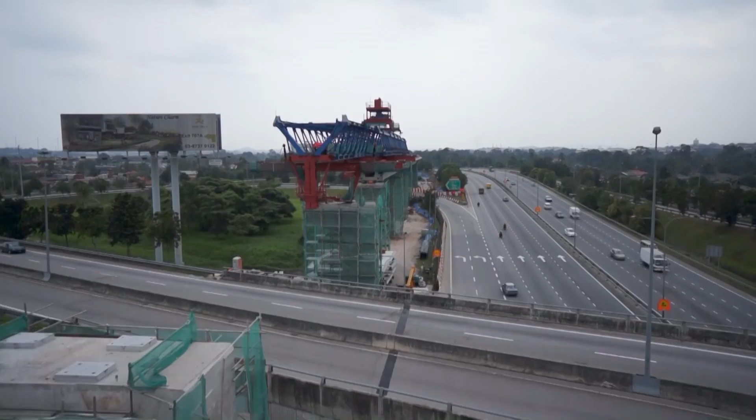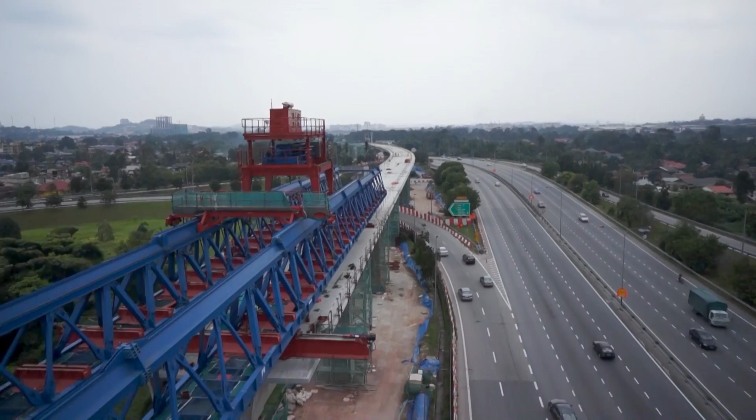First of all, you want a company or consortium that can deliver the project. Secondly, you want a project to deliver it on time and on budget. And thirdly, you want the risk taken off the government.

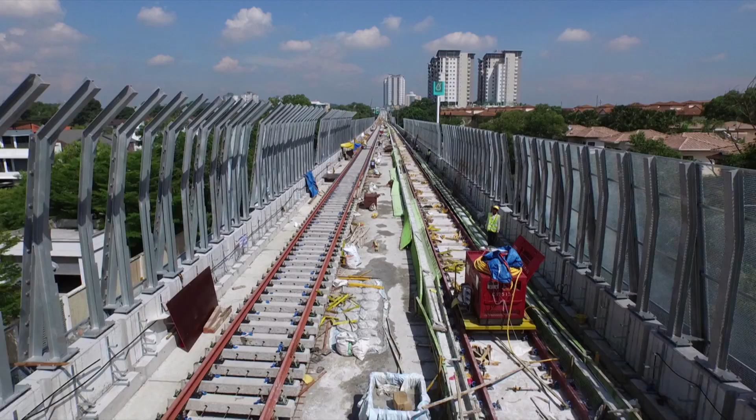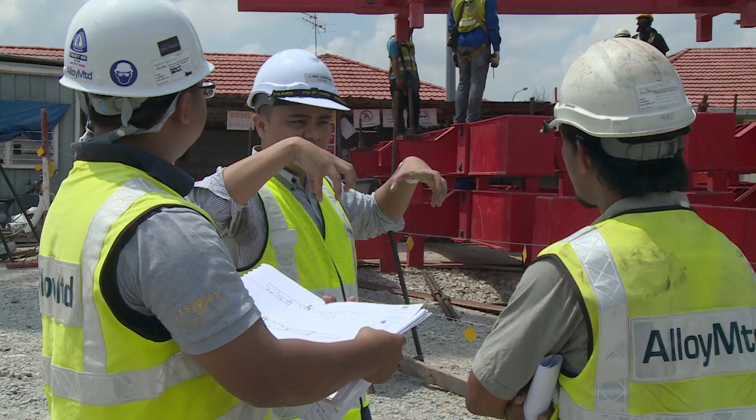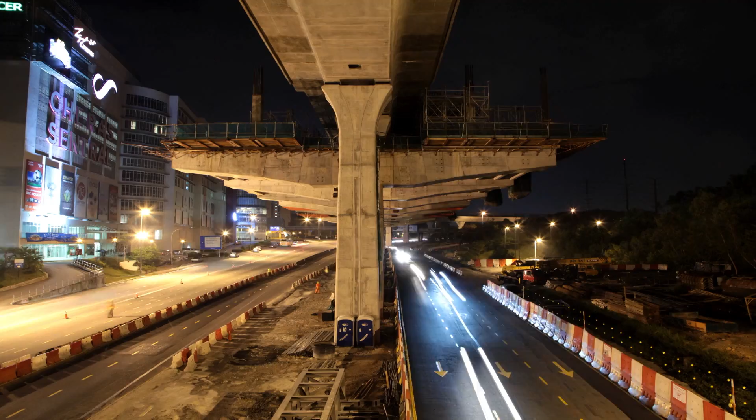The Bumiputra agenda will be an integral part of the KV MRT project. So we carve out a certain percentage of the contract and give it out to Bumiputra, but it must be on the basis of competition. And the Bumiputra contractors that will be awarded will be on the basis of being the best amongst Bumiputra.

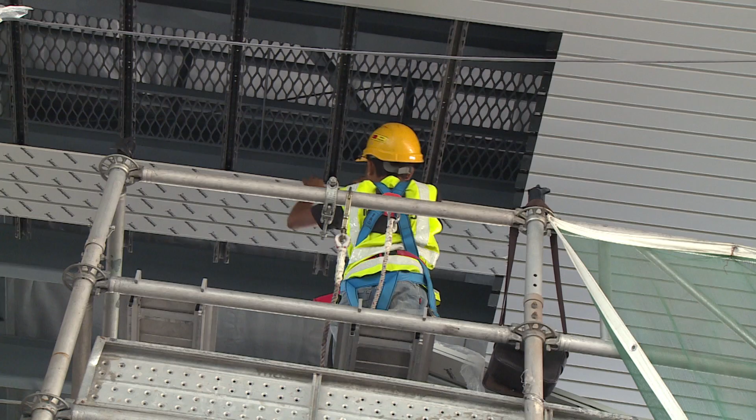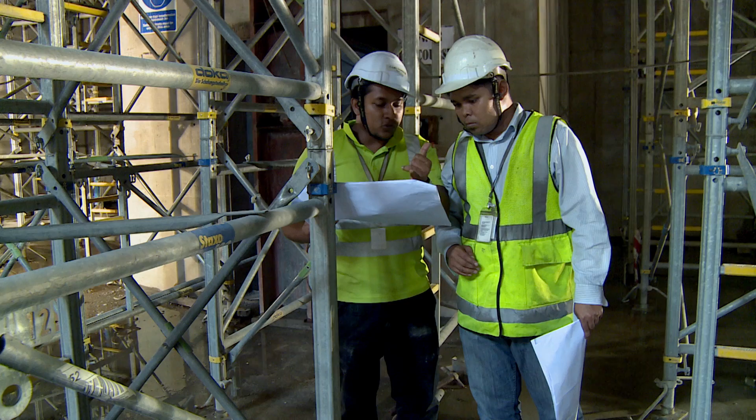We want this project to benefit SMEs so that the benefit will cascade to involve smaller firms. And as part of this project, 480 SMEs have benefited. They represent about 65% of the contract value.

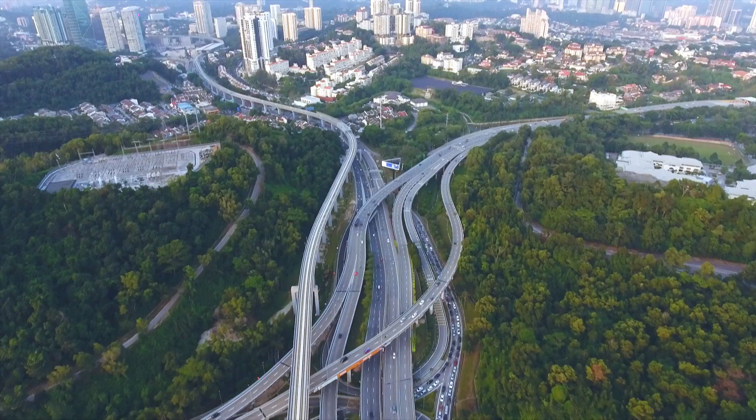The city was not planned enough to accommodate the high growth in population and development. That's why we have all this problem with finding a corridor to accommodate this kind of large-scale mass transportation system. We have had to share reserves, and put this alignment where there are public roads or public highways. So it was quite a challenge to achieve that.

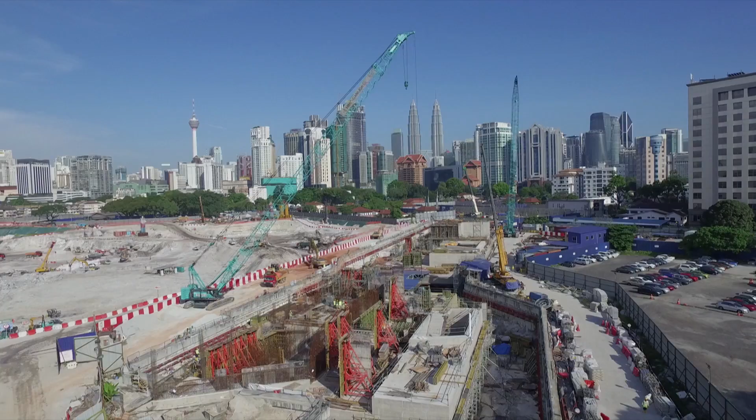Areas where we could go above ground, we went above ground. Areas where we needed to go underground, we went underground. Of course, when you go underground, the cost is higher, but in terms of aesthetics, it's definitely better. We didn't want to destroy any of the heritage buildings that we have. That was one of the policy decisions we made, to minimize changes to the existing physical landscape.

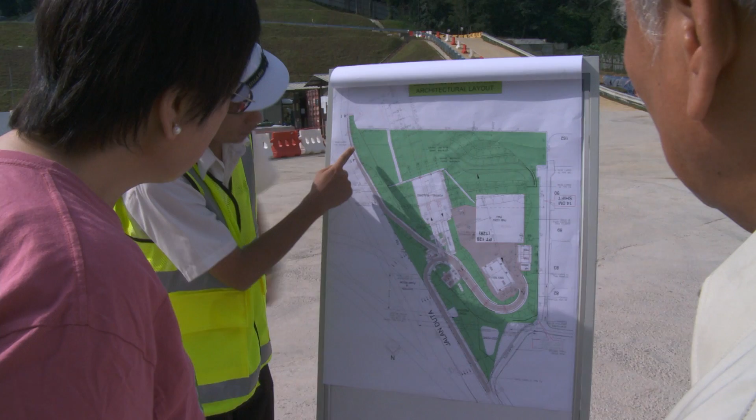Can you imagine 51 kilometers, how many residential areas we're passing through? Can you imagine if we do not engage, we do not speak to the residents? I always believe that people management, people engagement, stakeholder engagement is crucial. If we don't manage them well, if they don't understand the project and where we are heading to, it won't happen.

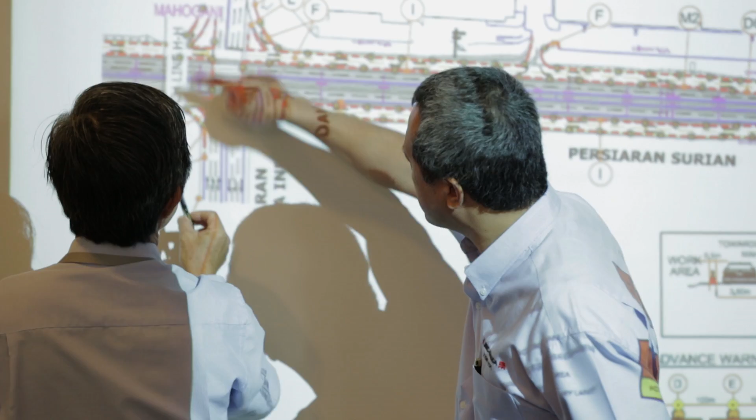Before we start any construction, we would have to plan the traffic management meticulously. Then we do simulation and trial closure. Once the trial is successful, then we go for full implementation.

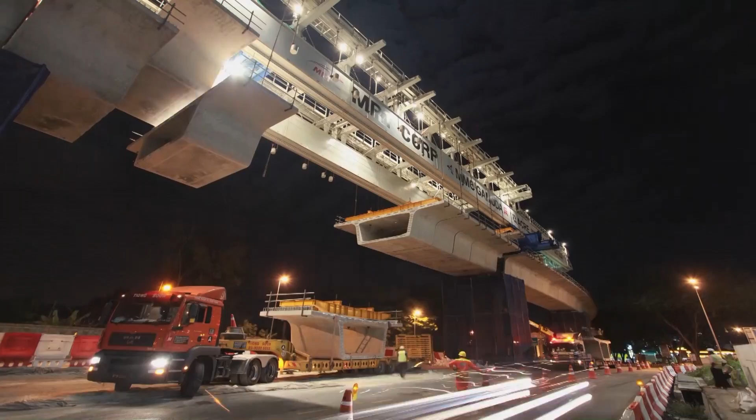The gantry is, in a sense, sitting between two piers, basically a sort of crane lifting mechanism. It lifts all the units together and aligns them so they're all in a nice line. And at our peak, we had 21 gantries. That's a lot of gantries.

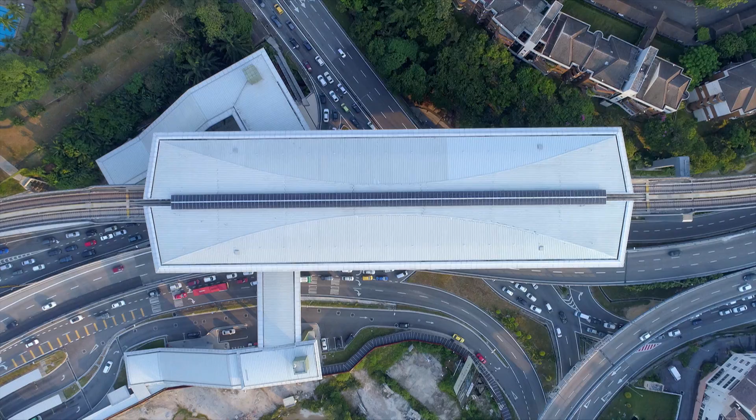The idea of the station was, we call it Wakaf. Wakaf being a sort of pavilion structure that you find usually in the landscape, synonymous with paddy fields and things like this. But the idea of Wakaf is also that the transportation is a sort of a gift to the people. It's something for the people.

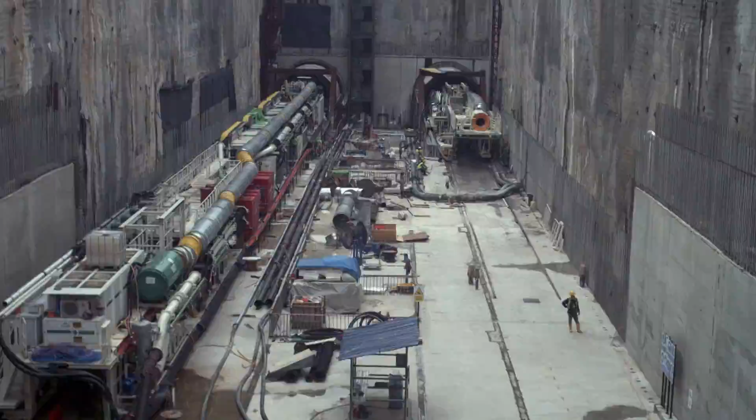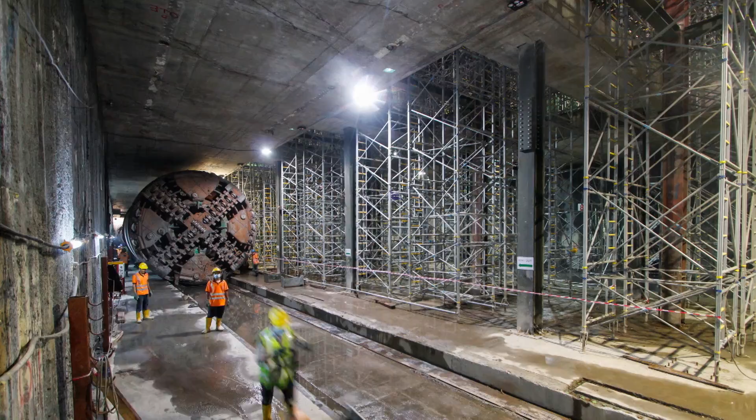It's actually a technological marvel. I was so impressed, I was in awe of that machine when I first saw it. It looks like a Star Trek movie, you know. And this is something that we can be really proud of.

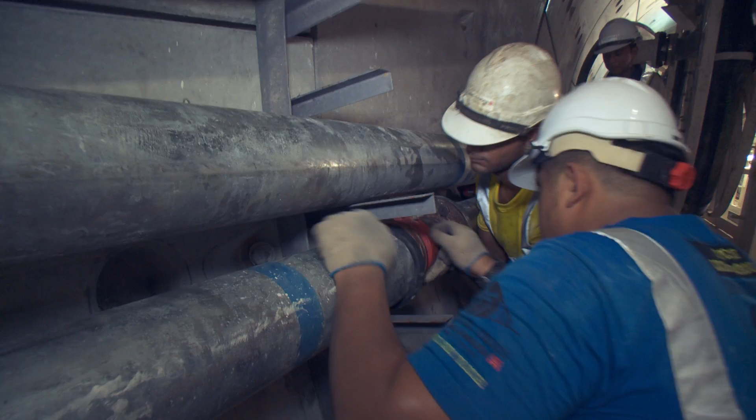People tend to look at a mega project in terms of the capital investment. But a mega project like this actually opens up wonderful opportunities for young people from the kampung to not only get jobs, but to be trained in a high technology field.

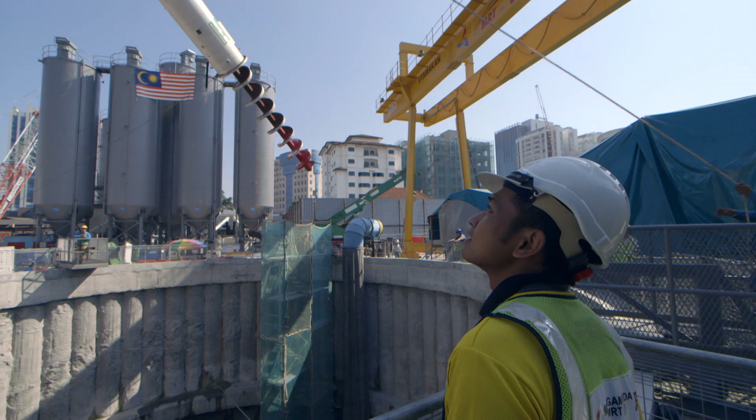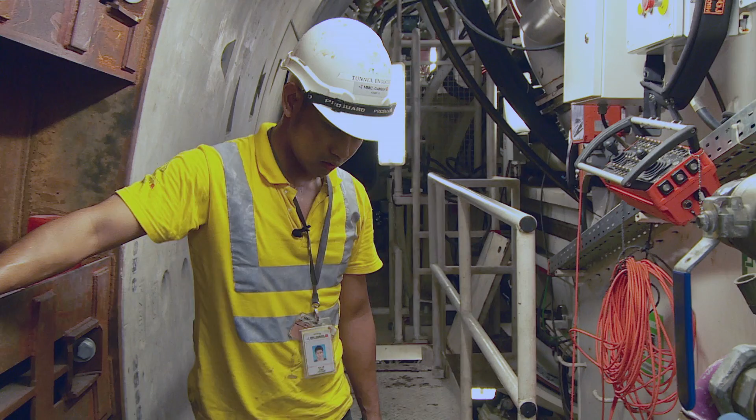Jurutera muda Malaysia telah menyahut cabaran untuk bekerja dalam projek infrastruktur paling kompleks di negara ini. I'm now handling one of the machines and running the full operation of the tunnel. I am lucky because I have good mentors teaching me how to actually control the machine, how to actually manage the people. It's quite challenging, but I think I like it because there's not many chances that you can be in a tunneling construction industry.

With that kind of work experience, they can find employment anywhere in the world. And this is what excites me actually - young people have an opportunity to work in this project. And we can be very proud of the fact that it is actually being delivered by Malaysians and by a Malaysian consortium.

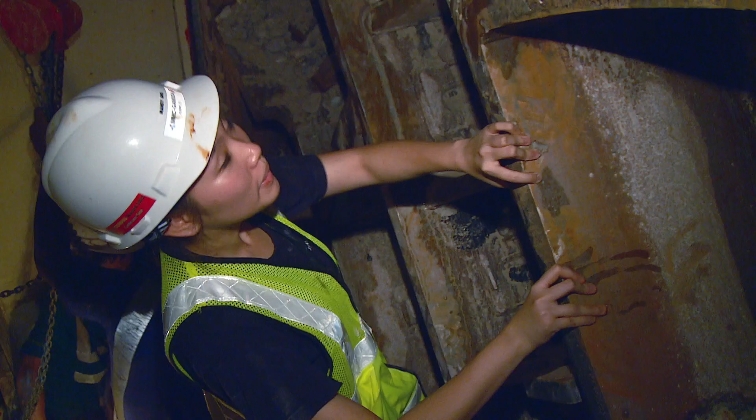We've always wanted more women to be part of the labour force, more women in the boardrooms, more women in top management, and more women in the technical field. So this project, when we see that it has succeeded in opening the door for more women to participate as engineers, I think that's a wonderful thing, and we want to congratulate Malaysian women.

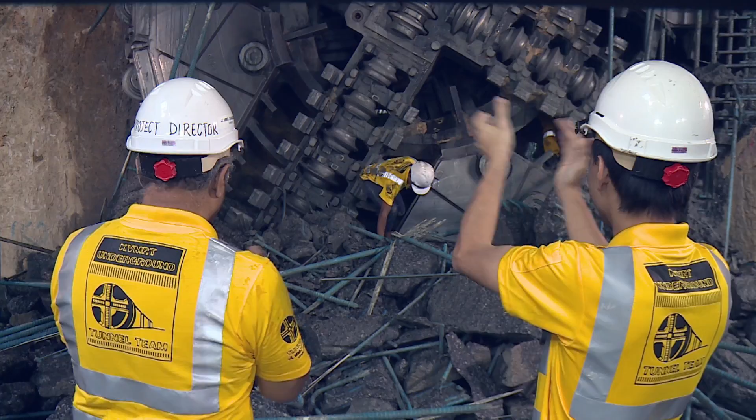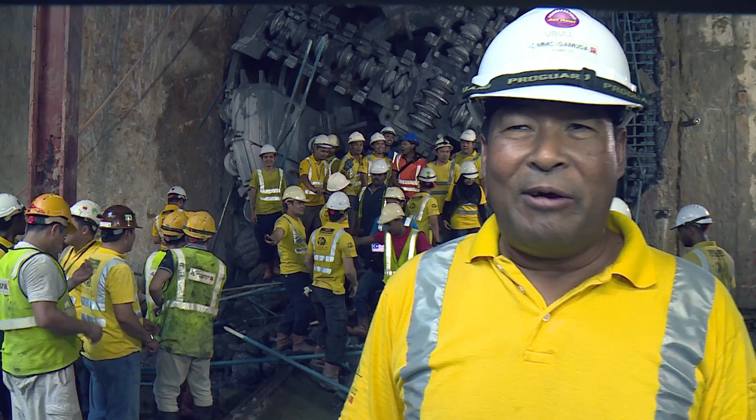We are improving ourselves. You can see 10 TBMs already been successfully implemented and completed without any problem to the surrounding, so you can see it's proven already. So I think we are very happy now, and we are very confident that we can do more for the coming future. Sebagai anak tempatan, saya bangga lah.

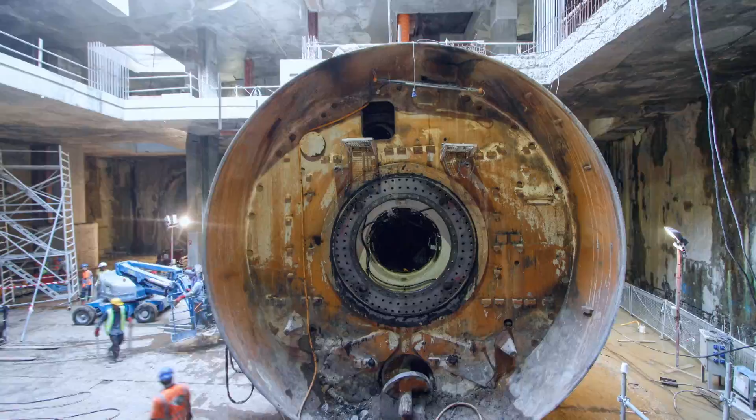It certainly is a great achievement, and in terms of Malaysia, it will enhance our profile internationally. And the very fact that we can win the international accolades is a wonderful achievement for all Malaysians.

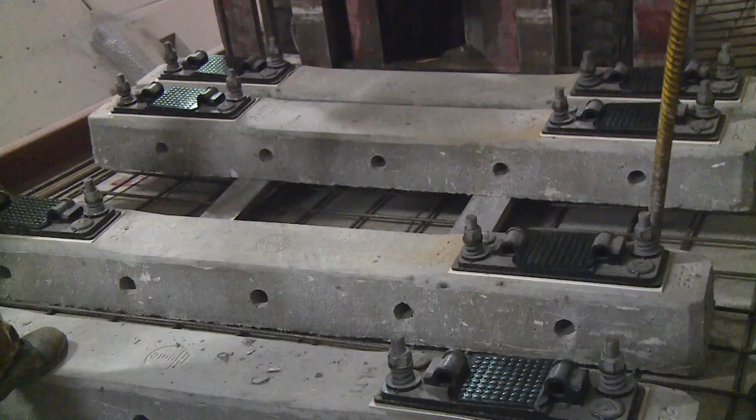Selepas kerja-kerja penerowongan siap, proses pemasangan trek bagi seksyen bawah tanah dan bertingkat dilakukan serentak. Trek ini direka bentuk khas bagi mengurangkan kebisingan dan getaran daripada tren. Pengoperasian tren ini akan dijanakan dengan kuasa elektrik justru memerlukan pemasangan rel kuasa.

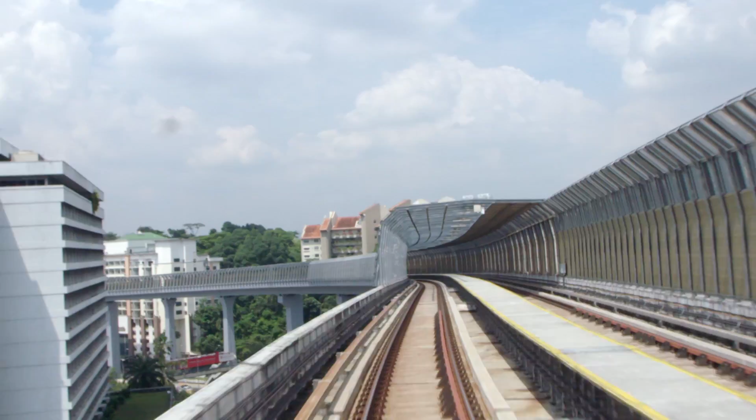Laluan pejalan kaki dibina di sepanjang jajaran. Ia membolehkan para penumpang untuk keluar daripada tren sekiranya berlaku kecemasan.

Penghadang bunyi dibina di beberapa kawasan tertentu di sepanjang trek jejantas. There were certain areas that were very close to residential areas, and what we did was install 3 different categories of noise barriers on the MRT alignment.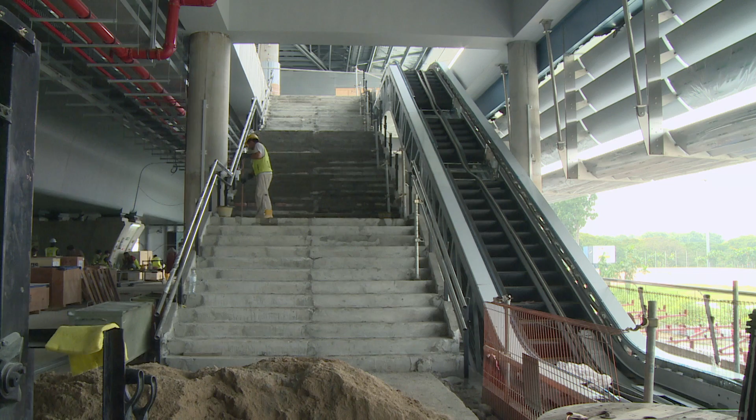Di stesen bertingkat, kerja-kerja akhir dijalankan di kawasan masuk stesen. Setiap stesen mempunyai minimum 2 pintu masuk dan sebahagiannya perlu dibina merentasi jalan besar atau lebuh raya. Selain tangga, pintu masuk dilengkapi dengan eskalator dan lift menjadikannya mesra OKU.

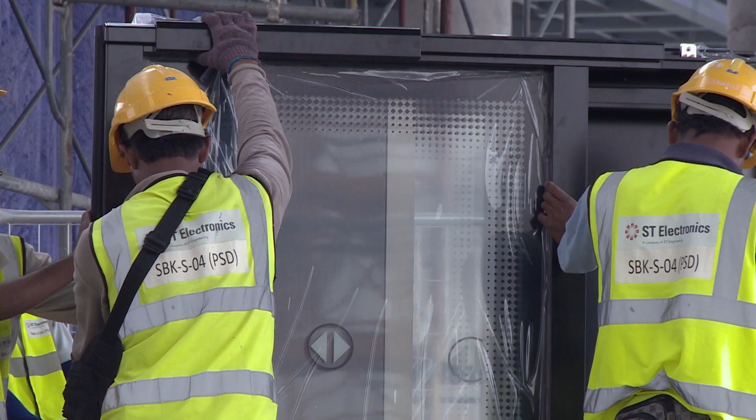Di bahagian platform, pintu platform automatik dipasang untuk memisahkan kawasan trek dan platform. Ini merupakan ciri keselamatan dan pintu ini hanya akan terbuka sekiranya tren berhenti di stesen dan pintu tren selari dengan pintu platform automatik.

Pintu kutipan tambang automatik dan mesin menjual tiket dipasang memastikan sistem pertiketan yang moden dan tanpa kegunaan tunai.

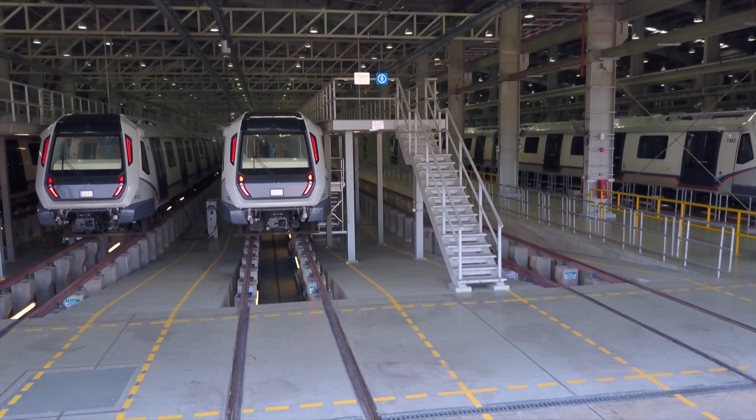58 buah tren disediakan untuk laluan Sungai Buloh, Kajang. Tren ini direka oleh BMW Group Design Works USA bertemakan Guiding Light, melambangkan ciri-ciri reka bentuk yang kukuh, moden, elegan dan berkekalan.

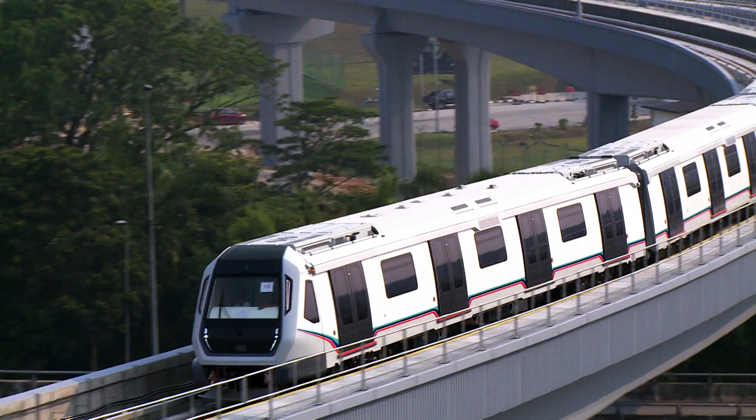Komponen train diimport dari seluruh dunia dan juga dihasilkan secara tempatan seperti kerusi dan lampu LED. Komponen ini dipasang di kilang pemasangan train yang pertama di Malaysia, terletak di Rasa, Hulu Selangor.

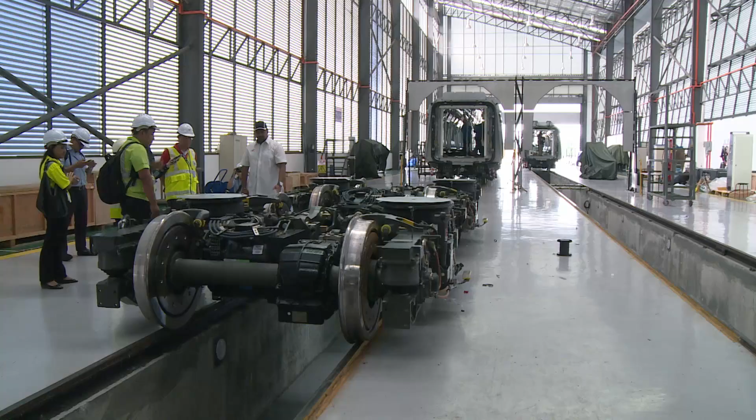For a full set of production in Rasa, it takes around 45 days for a train set. This is the first full-fledged assembly plant in Malaysia. Every single thing, the interiors, the exteriors, every single component here is fitted in Malaysia.

Selepas semua komponen dipasang, train akan melalui satu siri ujian untuk memastikan ianya dipasang dengan betul dan tepat.

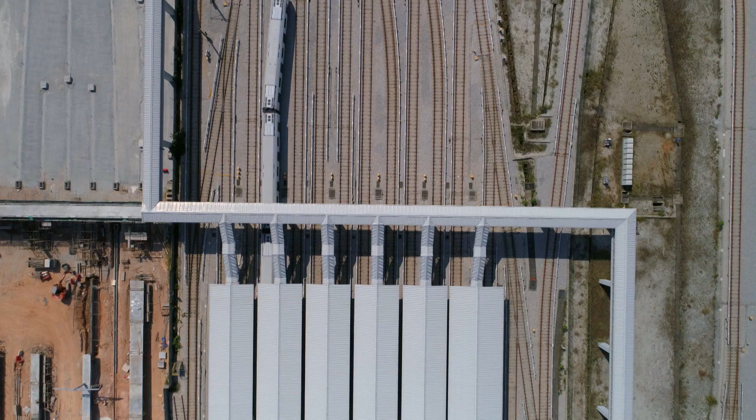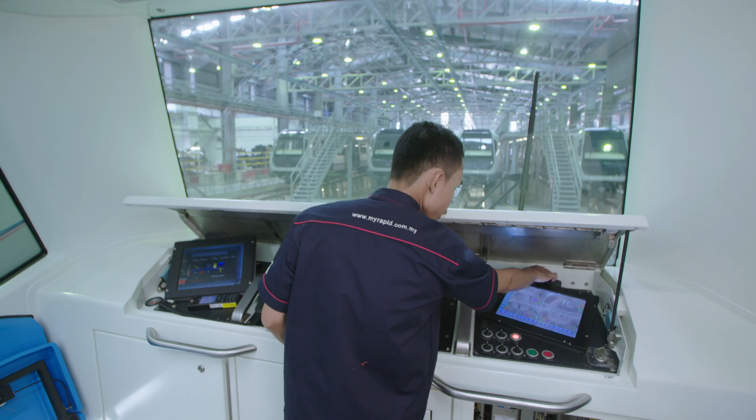Set train yang lengkap dihantar ke depoh Sungai Buloh, depoh train terbesar di Asia Tenggara. This depot can house 60 trains of Line 1 and more than 40 trains for Line 2. It has all the equipment that can support the overhaul and heavy maintenance in addition to the light maintenance of the train for Line 1 and Line 2.

Train ini menggunakan teknologi terkini. Sistem automasi train bersepadu yang canggih akan memastikan operasi yang diyakini dan efisien. We use a driverless system, so all the trains can be operated automatically by themselves. So it's one of the longest fully automatic MRT systems in the world.

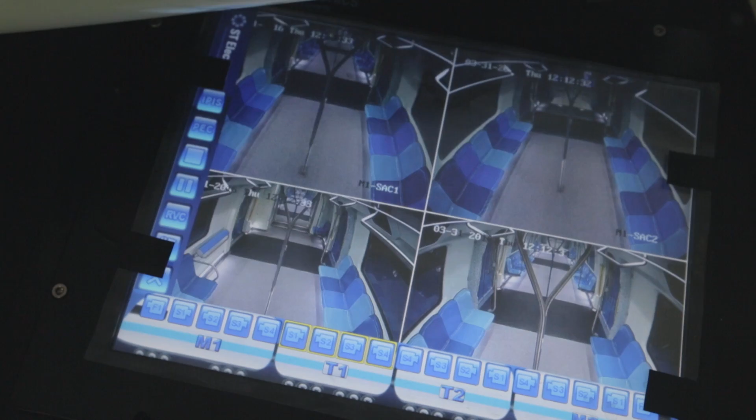Train juga dilengkapi dengan ciri keselamatan dengan kamera pengawasan yang dipasang di luar dan dalam train. We have 42 cameras per train, so we make sure that the passengers on board are safe and they will feel the security of it and they will feel comfortable to travel on the train.

Pada November 2015, Perdana Menteri Datuk Seri Mohamed Najib Tun Razak membuat lawatan ke depoh Sungai Buloh untuk memantau perkembangan projek MRT. I oversee this project overall and I'm briefed on a regular basis and I go down and look at the progress myself and I intervene if there are problems. So everybody is committed, the entire government, to making this project a success.

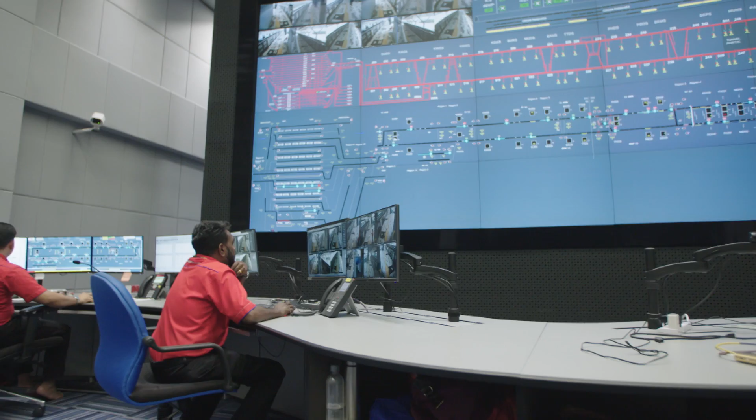Pengoperasian train dikawal sepenuhnya dari Pusat Kawalan Operasi di Depoh Sungai Buloh. The Operation Control Center is actually the brain for the entire fully automatic railway. So it houses the computers and also the workstations controlling the trains and also the different systems of the railway.

It allows the operator here to regulate the service so as to meet the demand of the passengers. Say, for example, during the morning peak hours, in case of a heavy rain that people don't want to drive because of traffic jam, there are more passengers using the train, then the controllers here will be able to adjust the service, pumping more trains into the service onto the main line to serve the additional passengers coming into the system.

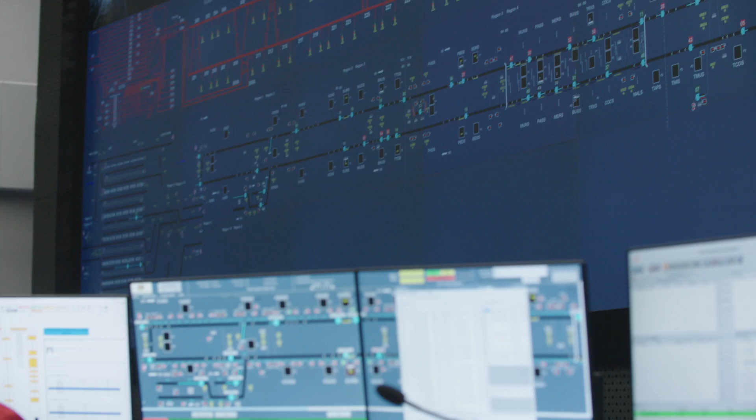Sistem kawalan train canggih ini membolehkan pengurusan operasi pengangkutan rel bandar yang efisien dan diyakini. Dengan menggunakan komunikasi tanpa wayar antara train, peralatan trek dan pusat pengawalan trafik, sistem ini dapat beroperasi sepenuhnya secara automatik.

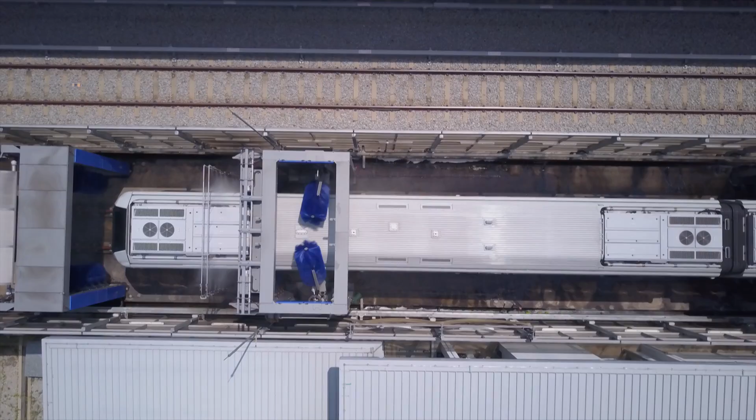The trains, when they come back to the depot, could be automatically routed through the automatic wash plant to clean the car body and then routed into their designated position to go to sleep. The train has a sleep mode overnight. Then in the morning, a certain period of time before the timetable launch time, the trains will be woken up and have the air conditioning units cooling down the interior of the train. Then the train will be automatically launched into service according to the timetable, one after the other. So all of this is fully automatic.

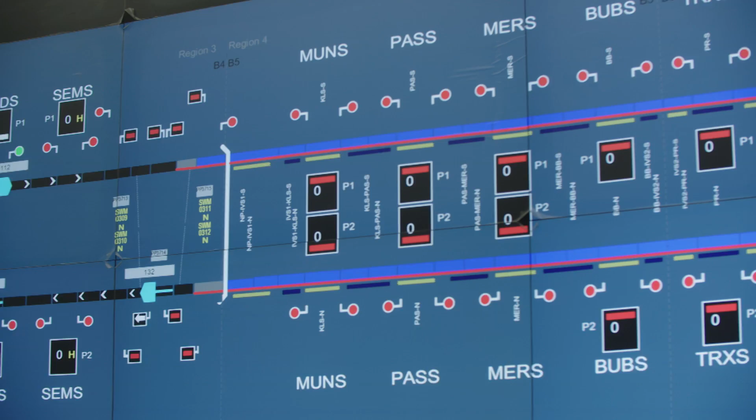Sebelum operasi tren sebenar bermula, adalah penting untuk menguji kebolehan pusat kawalan operasi bagi memastikan sistem berjalan lancar. We have entered the trial operation period, and these controllers are from Rapid Rail. They have undergone several months of training, not just on the system, but also the safety and operation rules and procedures to operate this railway. Percubaan operasi MRT dijalankan selama 3 bulan sebelum ia dibuka kepada orang ramai.

Now we are in the process of increasing progressively the level of service, putting more trains onto the main line, to let the trains and the system run in, to flush out any early bugs or failures, so that by the time we open the railway, hopefully we would have a very reliable and safe system.

Setelah tren melalui ujian dan pentauliahan yang teliti, fasa 1 bagi laluan SBK dari Sungai Buloh ke Semantan telah bersedia untuk dibuka kepada orang ramai. Pada 15 Disember 2016, Datuk Seri Mohd Najib Tun Razak melancarkan laluan MRT Lembah Kelang yang pertama.

Apa yang kita anggap sebagai satu impian kini menjadi realiti. Hari ini bukan saja hari yang teristimewa bagi kita, tetapi lebih daripada itu bagi rakyat Malaysia, kerana mereka akan dapat menikmati perkhidmatan pengangkutan awam antara yang paling moden di dunia.

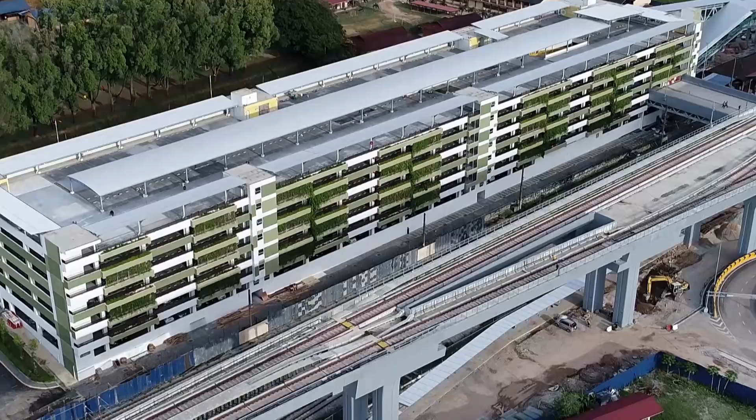Sejumlah 24 set tren yang boleh menampung 1,200 penumpang telah dilancarkan, meliputi jarak 21 km dan 12 stesen bertingkat. Untuk menggalakkan orang ramai menggunakan MRT, kemudahan tambahan seperti Park and Ride telah disediakan. Sebanyak 14 stesen menyediakan kemudahan Park and Ride. Untuk meningkatkan operasi MRT, perkhidmatan bas pengantara turut disediakan untuk para pengguna. Sebanyak 300 buah bas telah digerakkan untuk memberi perkhidmatan kepada komuniti di sepanjang laluan.

Pembukaan fasa pertama menandakan pencapaian penting projek ini, namun kerja-kerja masih belum selesai. More excitement now because now we're going into the underground section, getting ready for the phase 2 opening, and the excitement is there, it's brewing. Pasukan pembina MRT hanya mempunyai 7 bulan untuk menyiapkan laluan MRT yang selebihnya dari Semantan hingga ke Kajang.

Fasa 1 laluan Sungai Buloh Kajang telah beroperasi dan diterima baik oleh masyarakat Malaysia. The reaction has been wonderful, very positive, and this has given us a great deal of encouragement that we are on the right track and that the future looks very encouraging indeed.

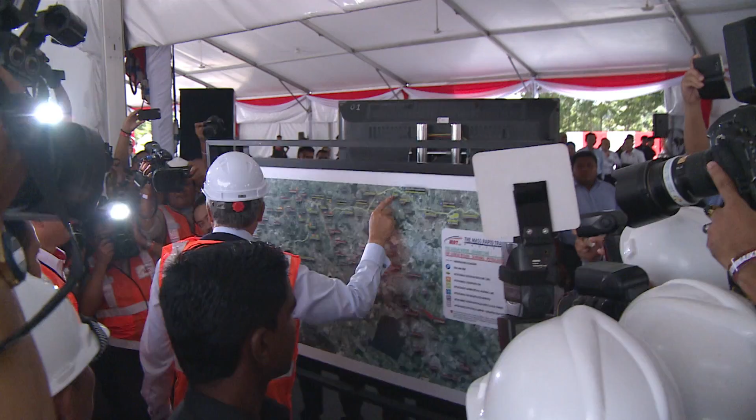Namun banyak lagi dilakukan oleh pihak kerajaan untuk meningkatkan perhubungan di Lembah Kelang. Laluan MRT kedua, laluan Sungai Buloh Serdang Putrajaya, dilancarkan oleh Perdana Menteri Datuk Seri Mohd Najib Tun Razak pada 15 September 2016. I think it's important that there is integrated and seamless connectivity. We cannot achieve that with just one line. We need multiple lines. By 2020, we hope to achieve 40% utilization of public transport, and to get to 40% means that we're on par with some of the developed cities in the world.

Laluan kedua MRT sepanjang 52.2 km dengan 37 buah stesen akan memberi kemudahan kepada populasi seramai 2 juta orang. Kerja-kerja telah dimulakan dan dijangka siap pada Julai 2022.

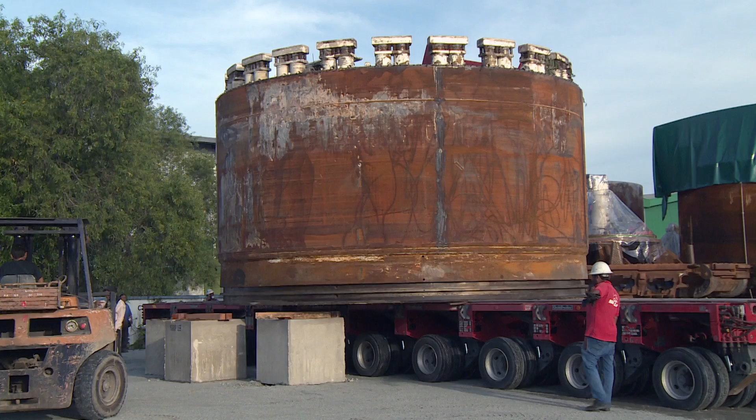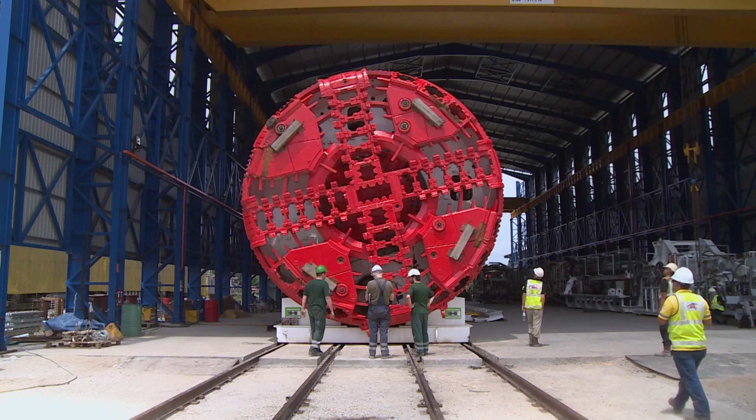Di kilang pembaik pulih mesin pengorek terowong yang terletak di Pusing, Perak, mesin yang digunakan semasa laluan pertama dibersihkan dan komponennya dibaiki sebagai persediaan untuk laluan kedua. Kemudahan ini, yang pertama di Malaysia, membolehkan pemindahan teknologi pembaikpulihan mesin pengorek terowong kepada jurutera Malaysia.

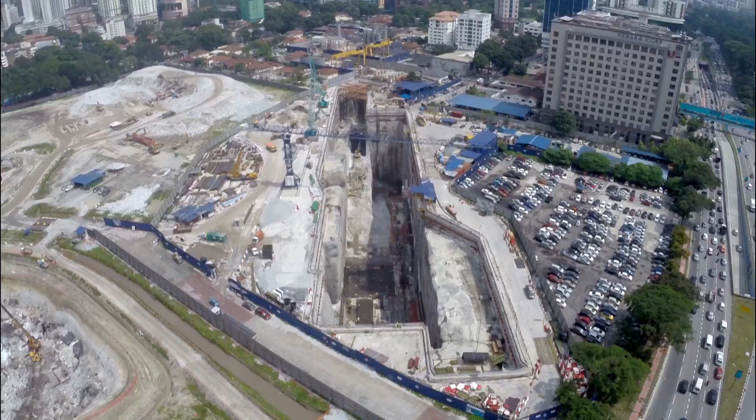Pasukan pembina bertungkus lumus menyiapkan fasa kedua. Stesen-stesen bawah tanah telah melalui perubahan besar. The civil works for these stations have been extremely exciting and very unique around the world. This particular station site was in limestone rock, and it was the largest station, one of the biggest excavated holes in the city. From then on, we worked very hard to build the structural works within the station, and an enormous amount of steel and concrete has gone in, all managed very well and done within record time.

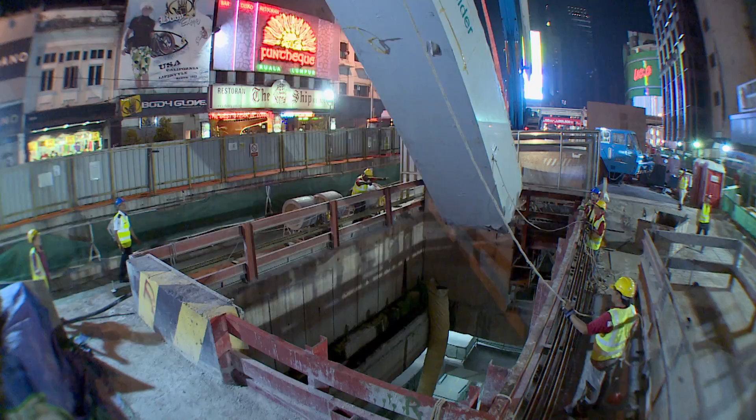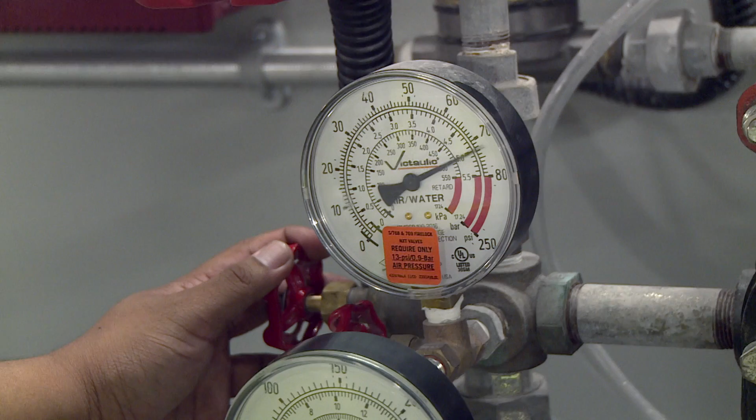Finally, when you actually have the primary structure ready, then comes all the fittings: mechanical, electrical, and architectural, and all the systems. Everything has to be tested. Your doors have to be tested. Your PA system, firefighting, the wet side, all the water, the sprinklers, everything has to be tested one by one. So there is no system that is not tested.

Dengan hanya beberapa bulan sebelum pembukaan laluan pertama, fasa terakhir pembinaan MRT diteruskan untuk memastikan tarikh pelancaran mengikut jadual.

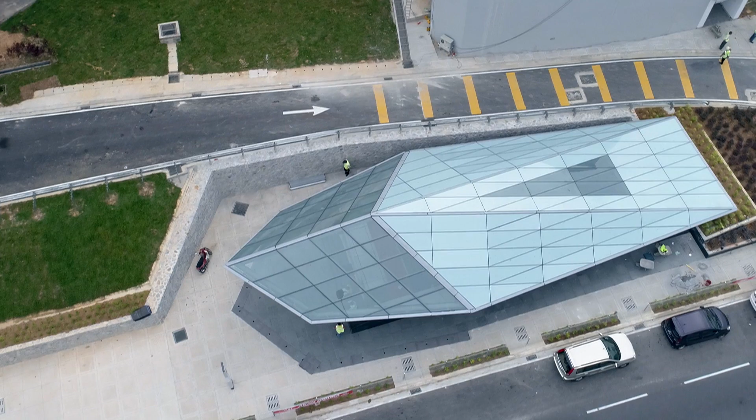Reka bentuk stesen-stesen bawah tanah diilhamkan oleh kuarza bersegi-segi yang terbentuk di Rabung Kuarza Klang Gates, Kuala Lumpur. We took inspiration from it, and the multifaceted shape of the quartz crystal and its multi-coloured reflections sort of resonate with the multiracial spirit and the cultural richness of Malaysia.

Setiap stesen bawah tanah mempunyai tema reka bentuk tersendiri yang menonjolkan keunikan persekitaran dan konteks sejarah. Reka bentuk stesen Muzium Negara diilhamkan daripada sejarah pengangkutan, dan tema peralihan adalah berdasarkan muzium sebagai penyimpan bahan bersejarah berbeza dengan pembangunan baru di sekitarnya. Terletak berhampiran Stadium Merdeka, tema bagi stesen Merdeka ialah kemerdekaan. Di sini, imej-imej patriotik dipaparkan melambangkan momen bersejarah.

Stesen Bukit Bintang terletak di segitiga emas Kuala Lumpur, lokasi yang sentiasa sibuk. Tema bagi stesen ini adalah dinamik.

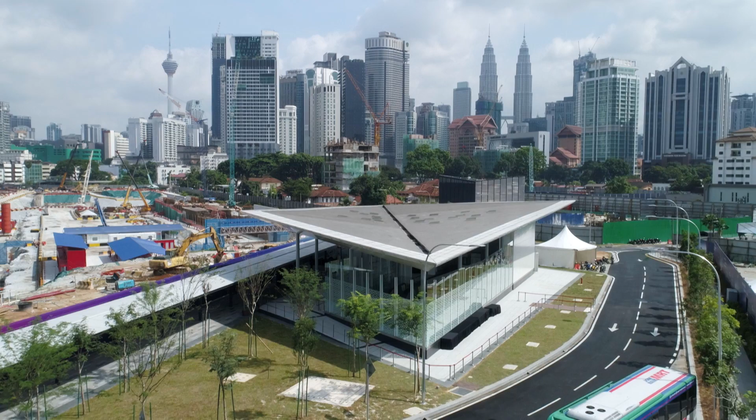Stesen Tun Razak Exchange terletak di kawasan yang bakal menjadi pusat kewangan Kuala Lumpur. Oleh sebab Malaysia merupakan peneraju sistem kewangan Islam, tema stesen ini adalah Corporate Islamic.

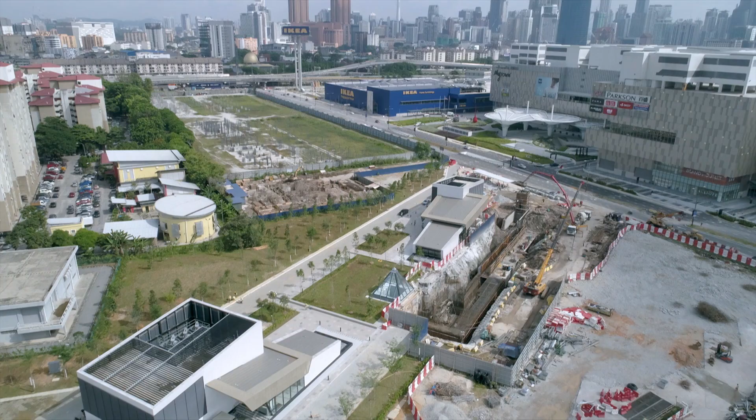Stesen Cochrane dan Maluri terletak di kawasan Kuala Lumpur yang sedang ditransformasi oleh dua projek regenerasi bandar. Kedua-dua stesen ini dijangka memainkan peranan dalam menghidupkan kawasan sekitar.

Di stesen-stesen bawah tanah, bangku yang direka bentuk secara unik oleh mahasiswa tempatan telah dipasang. Reka bentuk bangku ini dipilih menerusi pertandingan di mana pemenangnya ditentukan berdasarkan undian orang ramai.

Design saya di Cochrane Station menang tempat pertama. Saya bersyukur sangat pada Allah, family, dan kawan-kawan yang pernah tolong saya dalam menjayakan projek ini.

Pada Mei 2017, kesemua pengoperasian stesen telah diserahkan kepada Rapid Rail Sendirian Berhad yang telah dilantik oleh Kerajaan Malaysia untuk mengendali dan menyelenggara transit aliran massa pertama negara.

We've got a railway, 20 kilometres, which is open to the public, and then we have another 30 kilometres which is not open to the public. We have to stitch the two railways together, and we have to make sure at the end of the day that it runs as one railway.

Di Pusat Kawalan Operasi, pasukan Rapid Rail sedang bersedia untuk pembukaan fasa kedua yang akan menyambung laluan tren dari Sungai Buloh ke Kajang. Kita akan buat sistem test, kita tengok macam mana kecekapan sistem kita bekerja, macam mana train performance, dan macam mana pertambahan daripada bilangan customer.

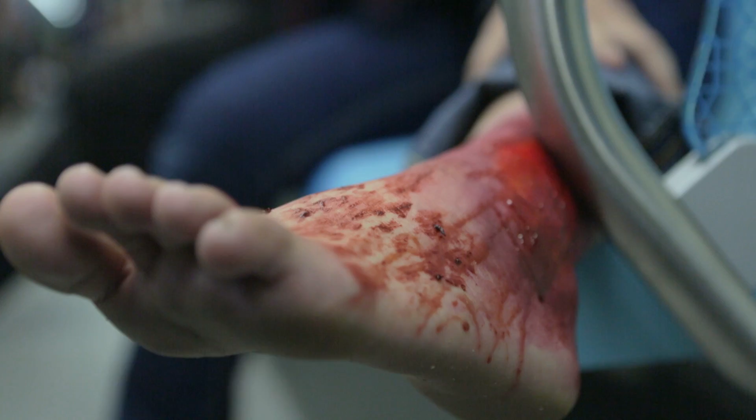Satu senario kecemasan sedang berlaku. Tren telah tergelincir dari landasan di seksyen bawah tanah. Penumpang-penumpang di dalam tren mengalami kecederaan dan kebakaran berlaku.

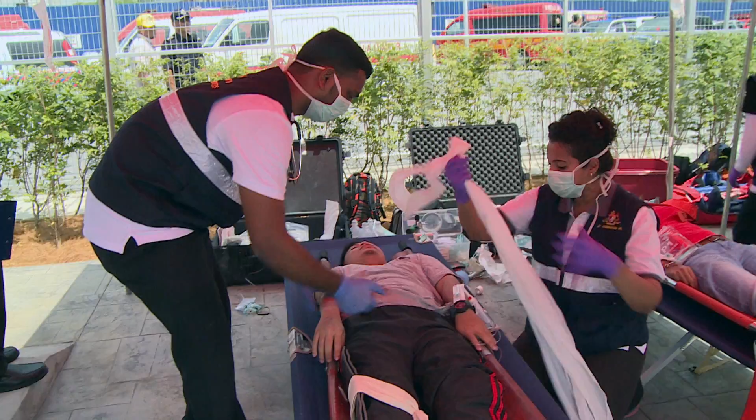Bersedia dari segi operasi dan dari segi kecemasan, dan juga bagaimana kita bekerjasama dengan agensi penyelamat seperti bomba, Jabatan Polis, Kementerian Kesihatan, DBKL dan lain-lain semasa berlakunya kecemasan seperti tren tergelincir atau kebakaran khasnya dalam tunnel. Latih amal ini merupakan sebahagian daripada pelan tindakan kecemasan, satu keperluan mandatory oleh Suruhanjaya Pengangkutan Awam Darat.

Atau SPAD, sebelum mengeluarkan lesen operasi. Berdasarkan pemerhatian kita pada hari ini, alhamdulillah semua pihak dapat bekerjasama memastikan bahawa latihan yang kita buat pada hari ini berjalan lancar, dan alhamdulillah setakat ini ianya berjalan seperti apa yang telah kita rancangkan.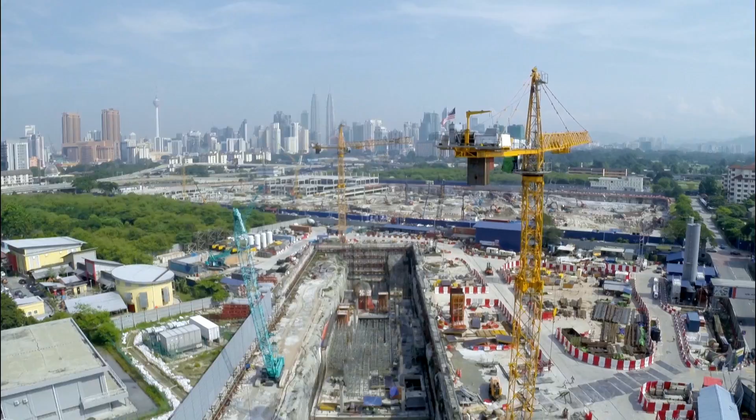6 tahun lalu, kerajaan memulakan pembinaan projek infrastruktur terbesar Malaysia, laluan MRT Sungai Buloh Kajang. Hasil dedikasi daripada ribuan pekerja yang terlibat dengan pembinaan ini telah merubah lanskap Lembah Klang.

After all the 66 months of challenging and hard work, finally we see it's a great deal. Quite proud of it. Apart from that, I think the quality has been very good, and our safety records and our environmental records have been excellent.

I've been building railways since I was a young boy, and I think that this is a really good one. I think it's been a great team that has put this together, and I'm really proud.

Hari ini kita semakin hampir dalam menjadikan Lembah Klang sebuah metropolis moden yang terhubung. Pada 17 Julai 2017, fasa kedua telah dilancarkan oleh Perdana Menteri Malaysia, Datuk Seri Mohd Najib Tun Razak, menandakan selesainya laluan Sungai Buloh Kajang.

I was involved at the outset when we conceived the idea of having this MRT service. And today we see the launch of Line 1, and for me personally, it has brought home a feeling that you have done something very significant for the people of Malaysia.

I'm so proud of the fact that this is a Malaysian project managed by Malaysians, that can succeed to be ahead of schedule and below budget. I think it's very rare that any country in the world could have achieved what we have done for Malaysia.

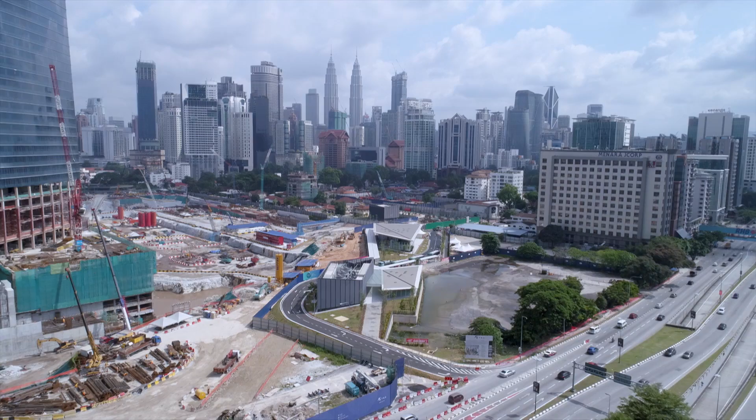I'm confident that given this project and the other mega projects that we are going to implement, inshallah Malaysia and Kuala Lumpur in particular will be one of the leading cities in the world.

MRT Malaysia melangkaui ekspektasi, mengubah kehidupan demi negara dan masa depan yang gemilang.